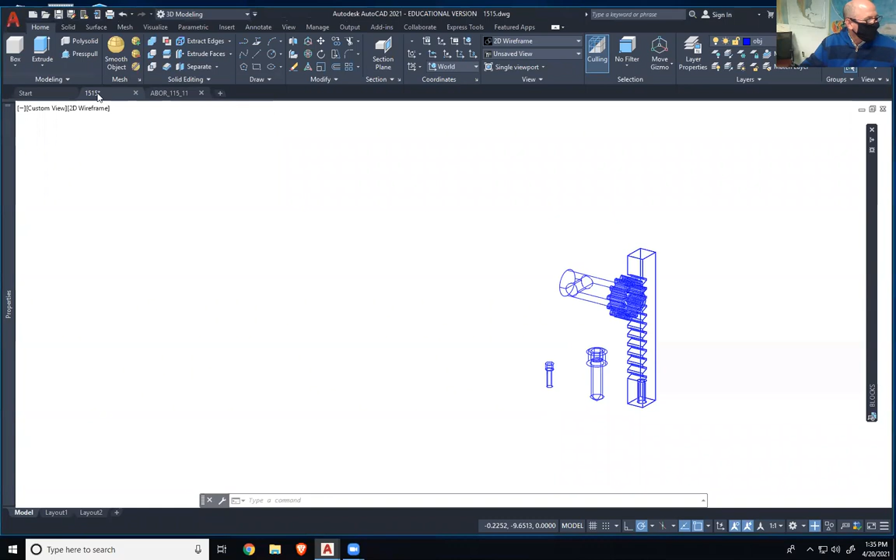I have this project in 2 files, or 2 different files, right? Although this seems to be gone. I wonder if I have that, so you can put it all together for your cover page, and the animation that we're doing.

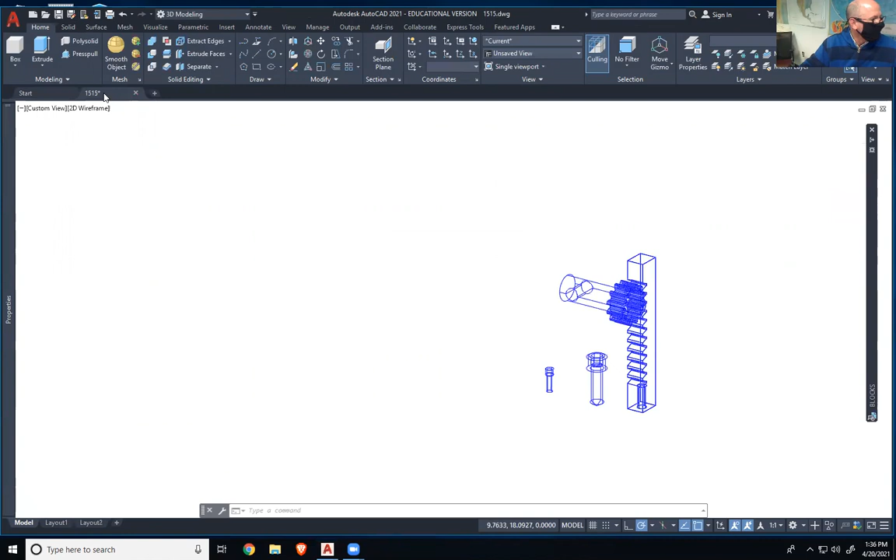Well, I might have to redo it. Anyway, let's not save that. I might have turned off some of the layers anyway. I'm just going to start with this one.

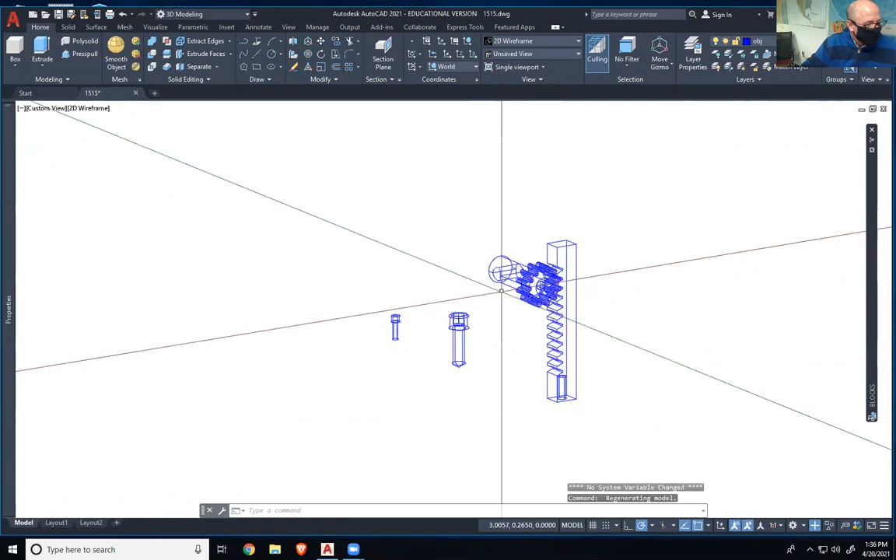So I need all this to be in position for the rest of the animation, right? As far as moving stuff around, I already have the gear and the pinion, and the rack, in the correct position, the correct distance apart from each other. So that's good. I'll put the handle through the hole here, and the column would be around that.

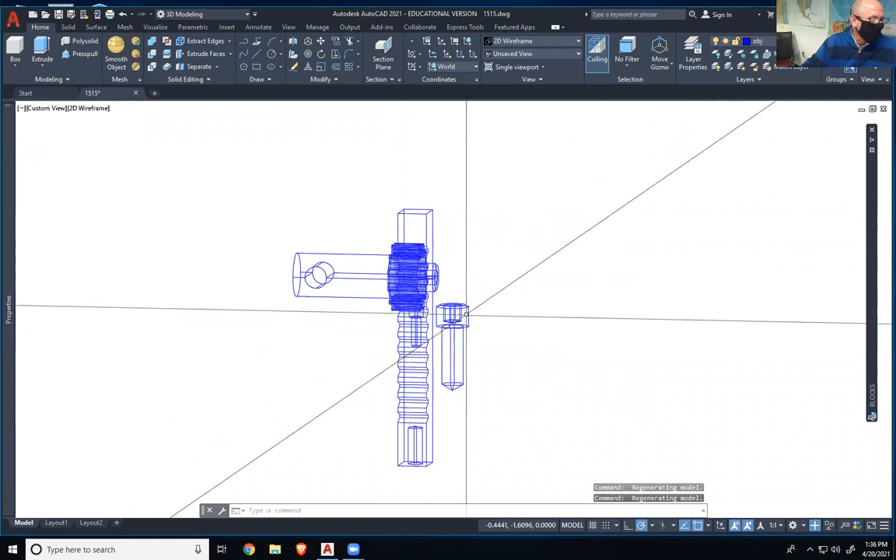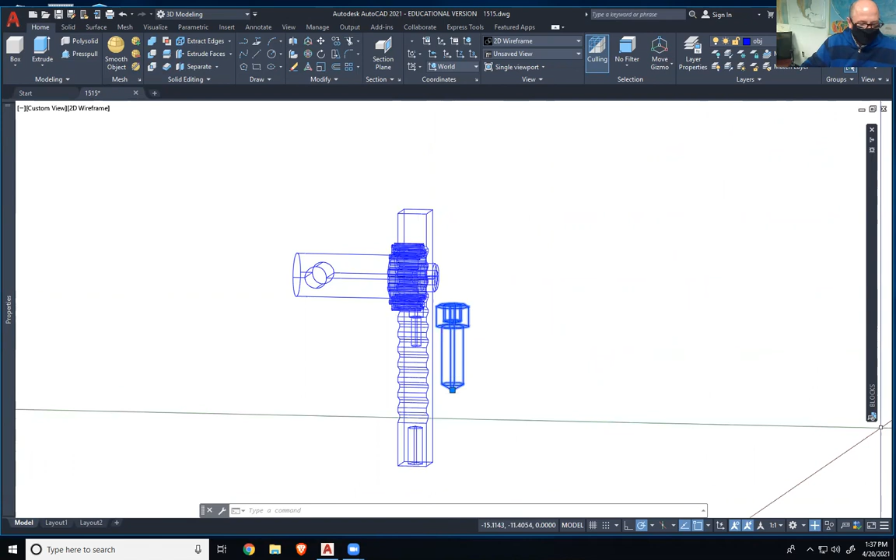This pin needs to be rotated and placed into position, as well as having the end cap of the rack, so it can have the whatever that thing's called, whatever the end of that cap is called.

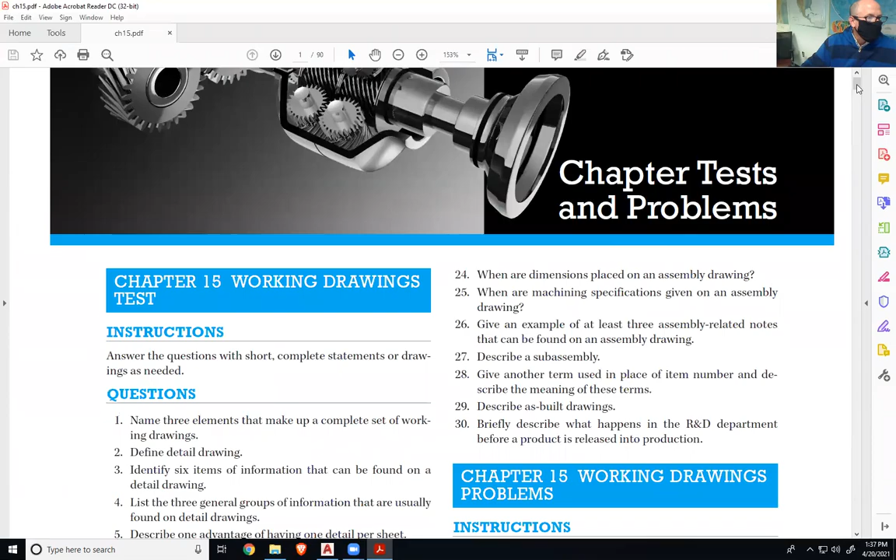I'll run this. Seems like, yeah. Hey. Where's the chapter 15?

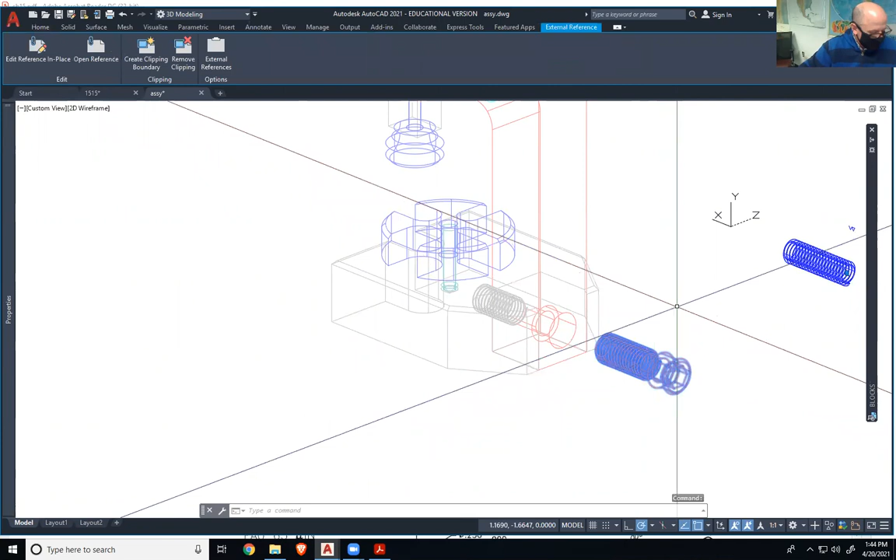All right, so I have it almost all assembled, just moving the parts together. I'm just going to use this as an example to show what all this was doing.

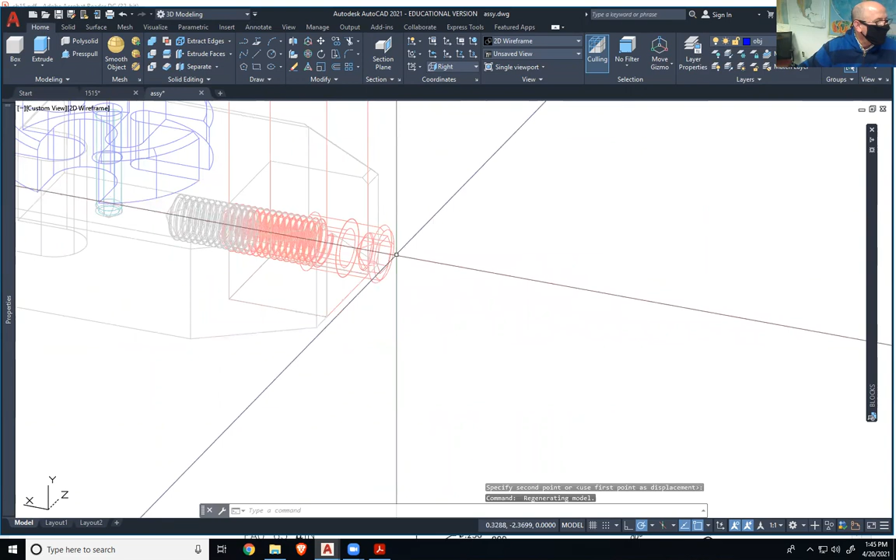I want this outside radius, this center to be centered on there, and that way the head of the fastener, or actually that's supposed to be countersunk, huh? So let's move it one more time from that center to this center. So now the head is countersunk.

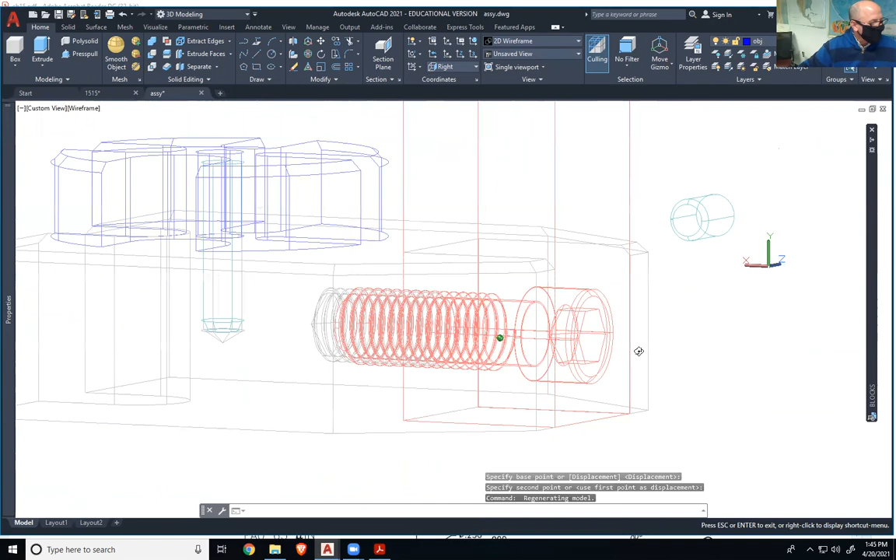Are we supposed to do the threads? No, I just did it for fun, but we don't have to. So I have the pin, so I have all the parts here that I need, and they're in position. Let's say we're at this point.

So now what I want to do is export each one of these individually, because if I do them all together, then I think I can explode them in Blender, but well, that may be easier, I guess. Let's just see how that works.

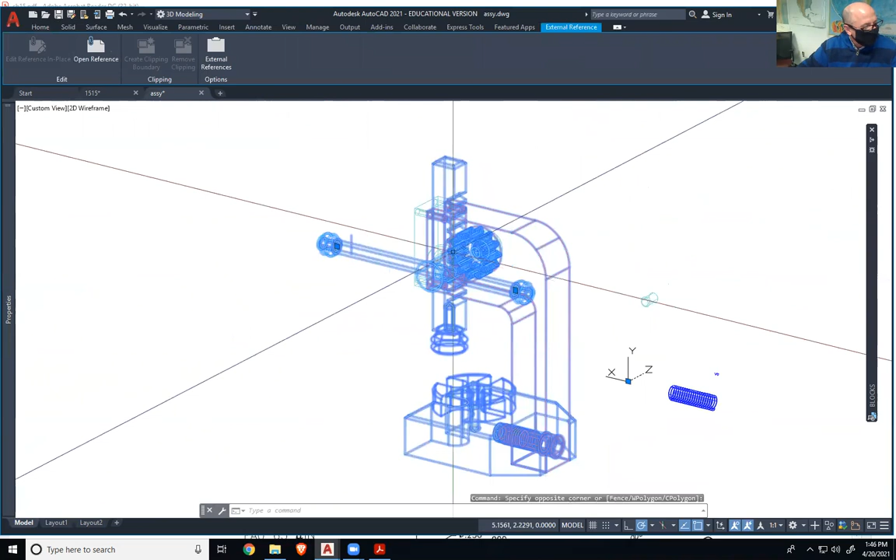So I'm going to select all of these, all the assembly. Although I didn't put these fasteners in here. For some reason I don't have these fasteners, so I get that part.

Okay, so I have them all selected, and I can just go and export them from the application menu to other formats. Blender takes a lot of different formats, but STL is probably one of the easier ones. In fact, that's what I'm going to use.

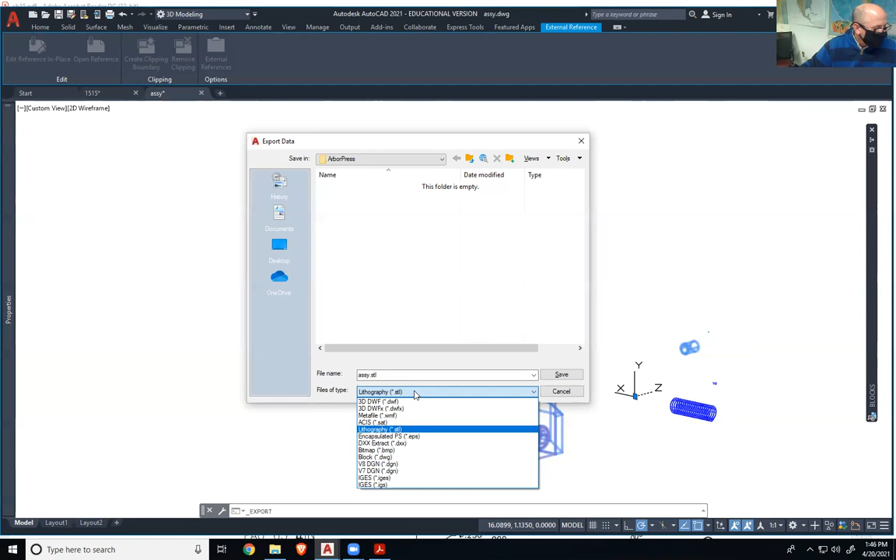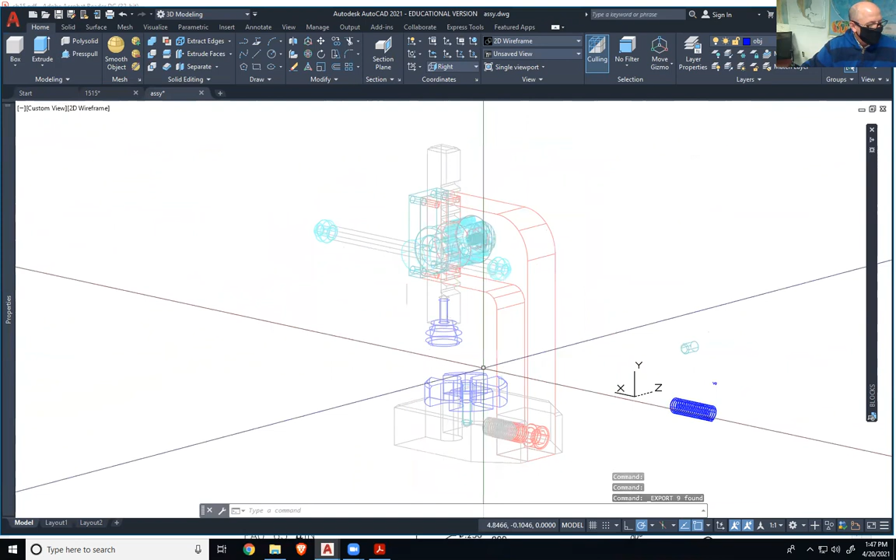So, call it... So there are 9 parts here, and I think that's correct, minus those screws that I left out.

Okay, so once they're exported, let's see what Blender thinks of them, and see how easy it is to break those apart. I'm not remembering exactly how to do that, but we'll look at it.

So we have Blender 2.91, I think, maybe 2.92. No, 2.91. Actually, I think your computers are 2.92, but there shouldn't be any huge differences that'll get us in the way here. I'm going to launch Blender, and then we'll import those STL files into Blender and see what we can do with these parts.

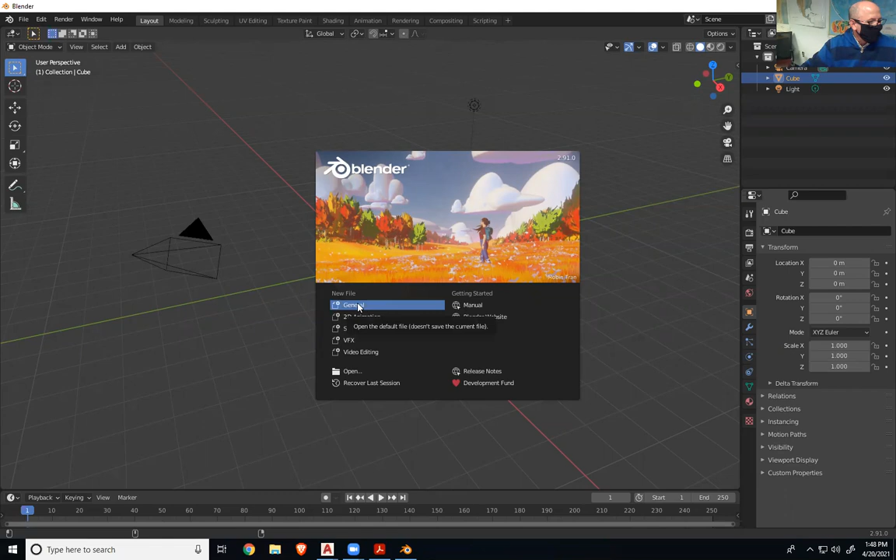There's 3 main functions that I want to emphasize in Blender. AutoCAD can do some of them, but it can't really do the animation very well at all, I guess. So one of the things is to animate it, just animate the assembly and maybe the operation of the assembly, as well as, so I think I'm just going to keep the regular general file.

What you're going to get here is a cube, which I'm going to delete promptly, a camera, which I'll leave there, and a lamp, a light source. So I'll leave those there, and I'm going to import.

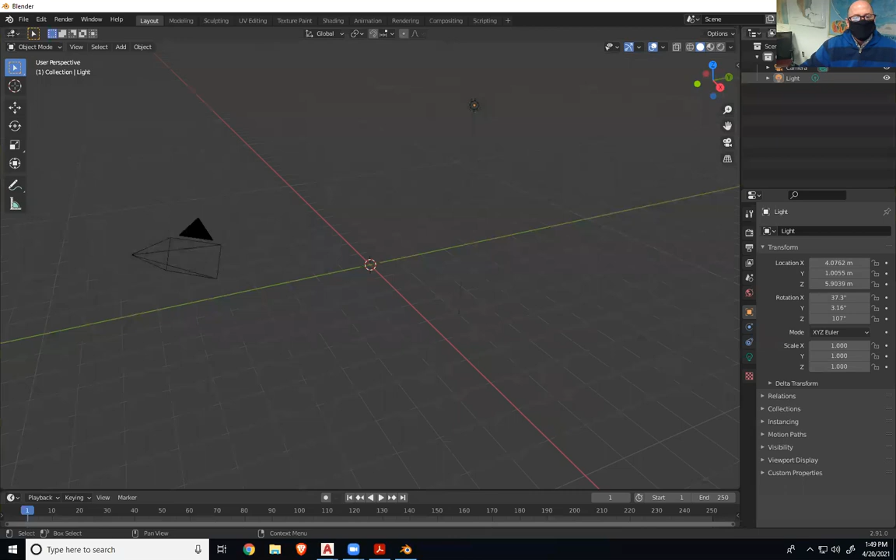But sorry, was there a question though? All right, so to import them, I'm going to go to File, Import, and STL. It's a good file format for 3D printing, as we've talked about before.

I don't know what this computer's doing, but it's kind of slow. Shouldn't be. Is it scanning or something?

Okay, so now I just have to find where it is. Oh, maybe I should save it, huh?

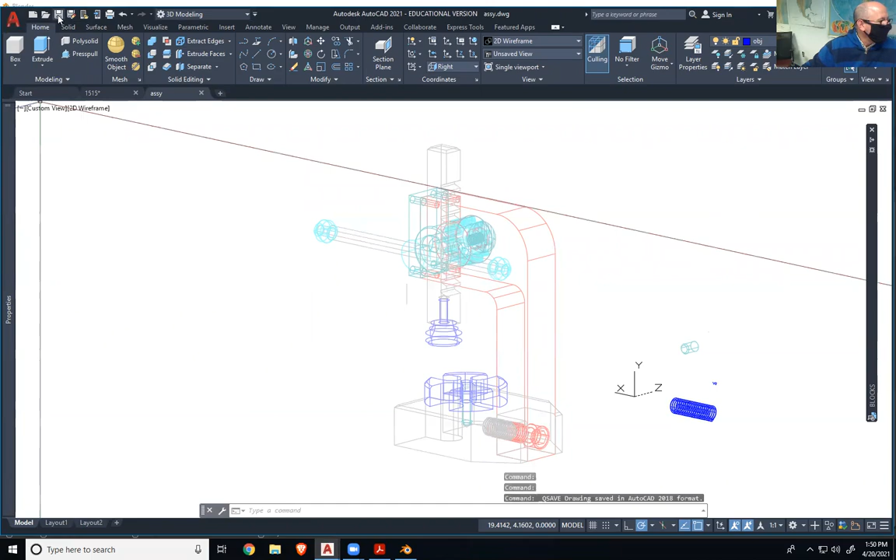Yeah, Mr. Stevie, are you recording this one? Yep. Yeah.

Okay, so here's the entire assembly. It's lying on its side. That's a little odd, I wonder why. Anyway, not too hard to rotate, so I'm just going to hit the R button, and that just does a free rotate.

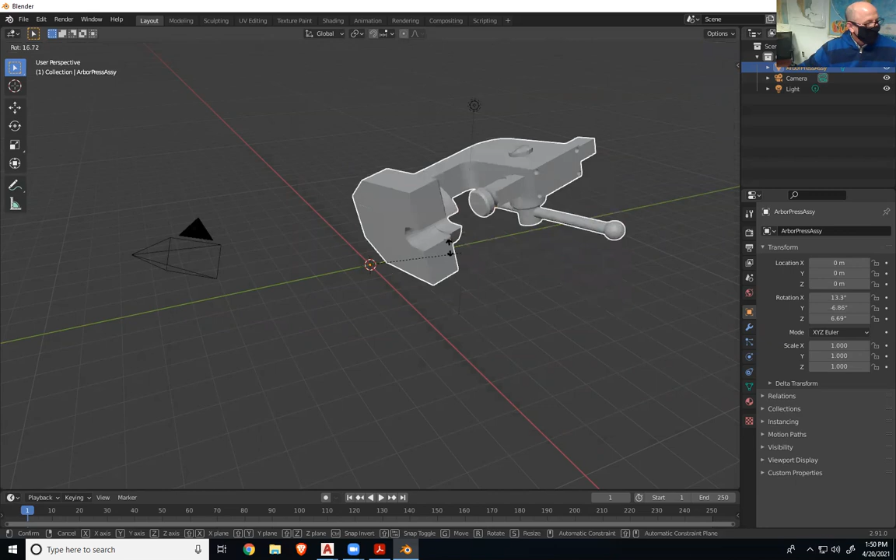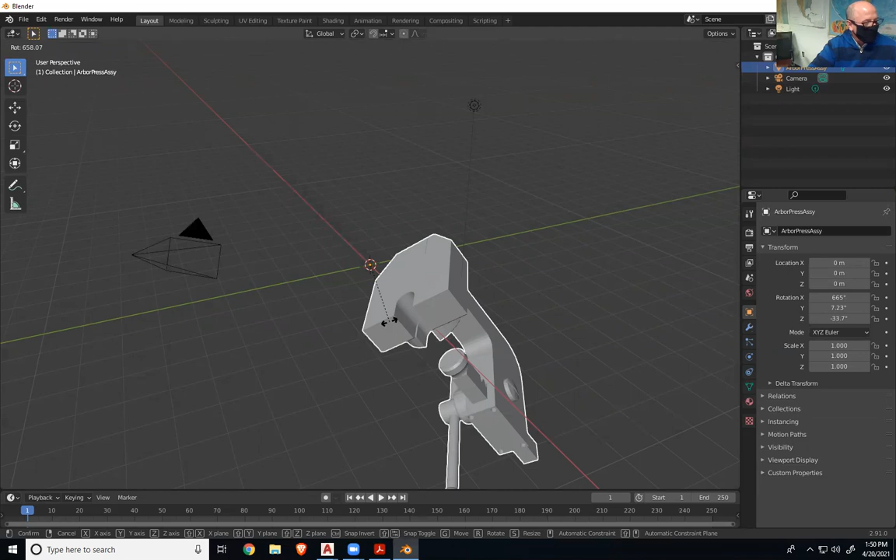Just like in AutoCAD, the color of the axes indicate the labeling of the axis, right? So XYZ and RGB are parallels, or whatever. So I want to rotate it about 90 degrees, about the red, which would be the X axis. So I'm going to hit X, and once I hit X, I can see that it's only rotating about that X axis. Then I'll just type in 90 here. It might be upside down, but it went.

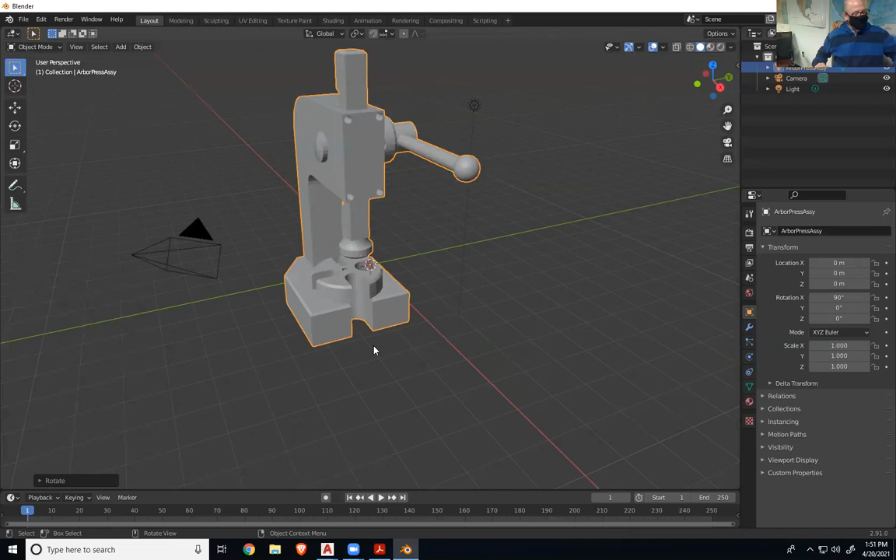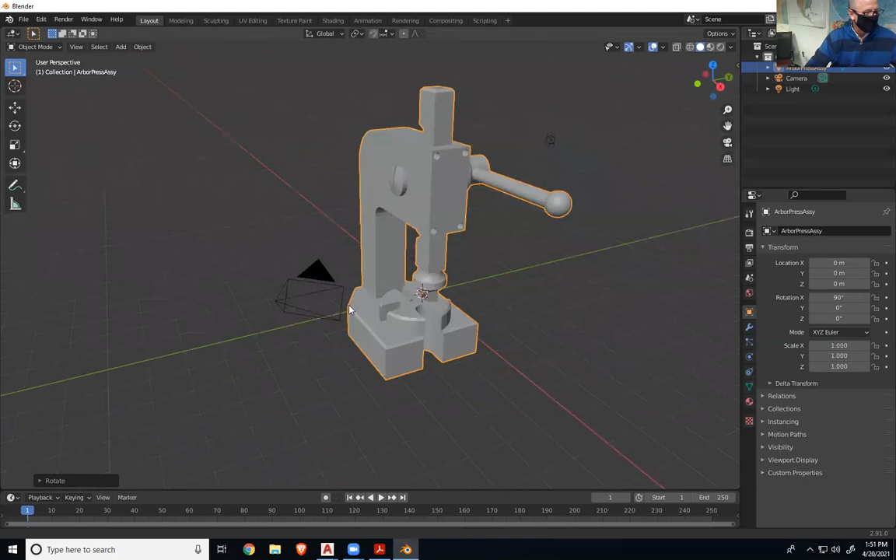As far as navigating, it works the same way as AutoCAD, except it's inverted in one respect. I can roll my mouse wheel to zoom, and I can use my middle mouse wheel as a button to orbit or arc rotate. And if I hold shift, it pans using the middle mouse wheel. So that's the only difference, really.

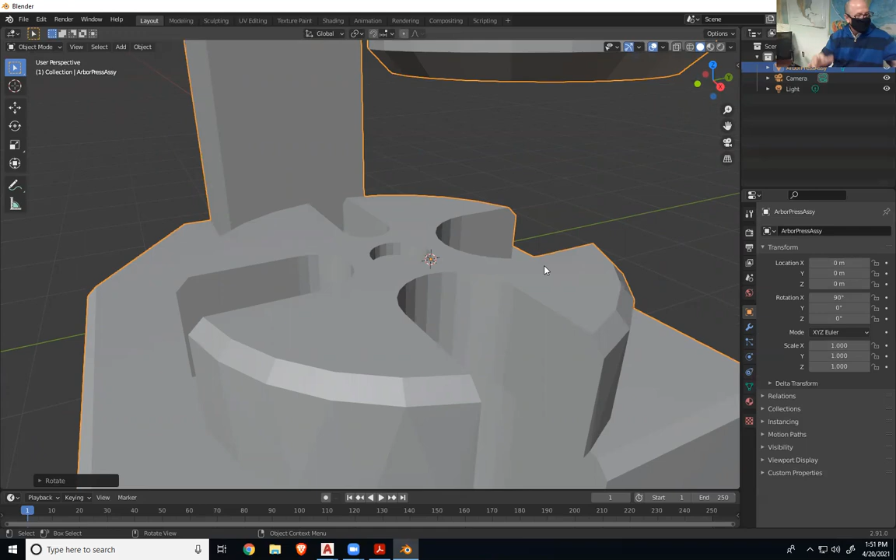The other thing I want to point out is if I look at how AutoCAD imported or exported the file, if I get in close, I can see that it does a pretty coarse surface interpolation. I can see the faceted edges. So maybe I could do better.

So I'm going to delete that, and we'll go back to AutoCAD. I'm just going to type in FACETRES, which is short for facet resolution. Right now it's at 0.5. I think you can put it all the way to 10, so I'm going to go ahead and put it at 10. It's just a system variable - the lower the number, the more coarse it is, but the faster it will act.

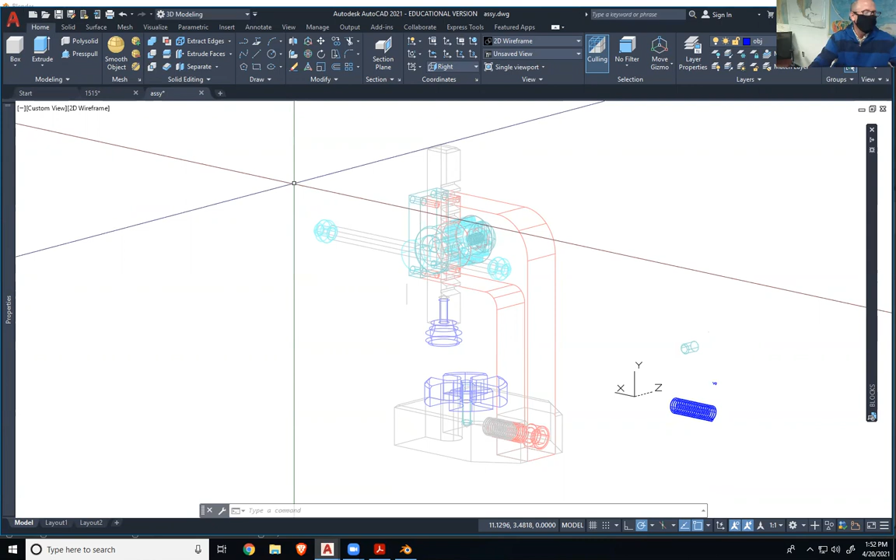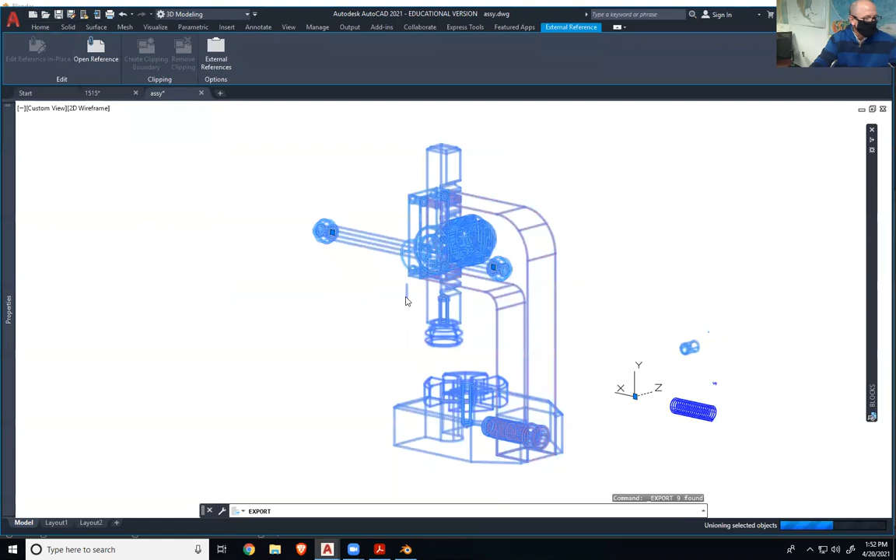Okay, so again, I'll select everything. I wonder why that doesn't get selected. Okay, and I'll go back to export, other formats, STL, and I'm going to overwrite that because that was the low res version.

And now it's unioning these together, which, yeah, that's probably not what I want, but we can maybe use Blender to fix that. And we're going to import it again.

Something's up with the file system here. Shouldn't take this long - it's got to be our server switches that aren't working right. Or maybe it's all the Bitcoin mining. Just kidding, it doesn't take networks that much anyway.

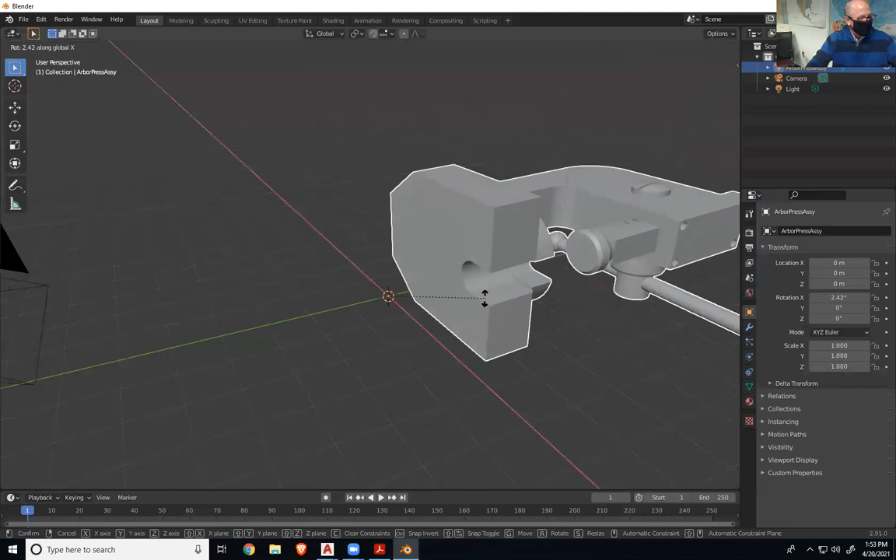Okay, so R and then X and then 90. So if I zoom in here, I can see that it's a finer resolution, not that much finer, but it's better. It's about as good as AutoCAD can do.

Did you say you unioned that all together, or are they still separate? They're unioned - AutoCAD did it when you export, if you select everything and export it.

But if I hit the tab key, this goes into what Blender considers edit mode. So here's some interface things to point out in Blender: right now you can use the tab key to toggle between edit mode and object mode. Object mode is just where you can rotate the object or whatever. Edit mode allows you to get to sub-objects, kind of like in AutoCAD where you have filters for vertex and edge and face and things like that.

So in edit mode, I can see some edges and things like that, but I can also pick what I want to edit. I think by default it's on vertex, but I'm kind of hoping I could get to some sort of element mode.

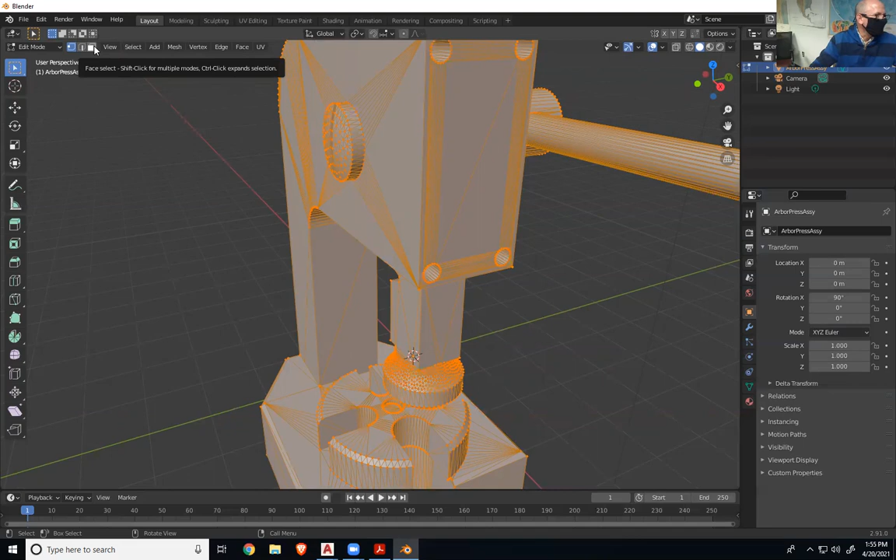Yeah, all I have - this is not great, this would be hard to select out. Vertex might be the easiest one anyway. So I have vertex, I have edge, and I have face mode. If I am on face mode, I can select the face and extrude a face, but those are all triangulated, and so that would be very difficult to manipulate and rotate the individual objects and things like that.

So, probably not a great idea. I might be able to, I'll try one more thing I guess.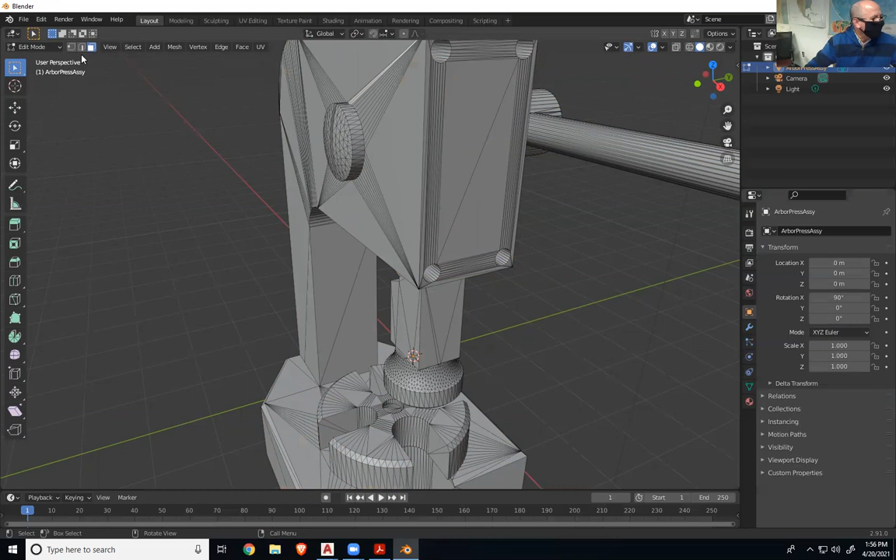So with this object, I can go to the wrench on the right, so I have different categories of properties - world properties as opposed to object properties, as opposed to modifier properties. So under modifiers, I can modify this object, which is kind of what I want to do, but I don't know if there's a good one in here.

There's edge split, but that's not going to help me much. I was hoping I could do something on the decimate, but that comes close, not really, because all that does is simplify faces. Kind of want to do some sort of explode into its individual elements or parts, but it doesn't look like I can do that. There may be one, but I'm not thinking of it.

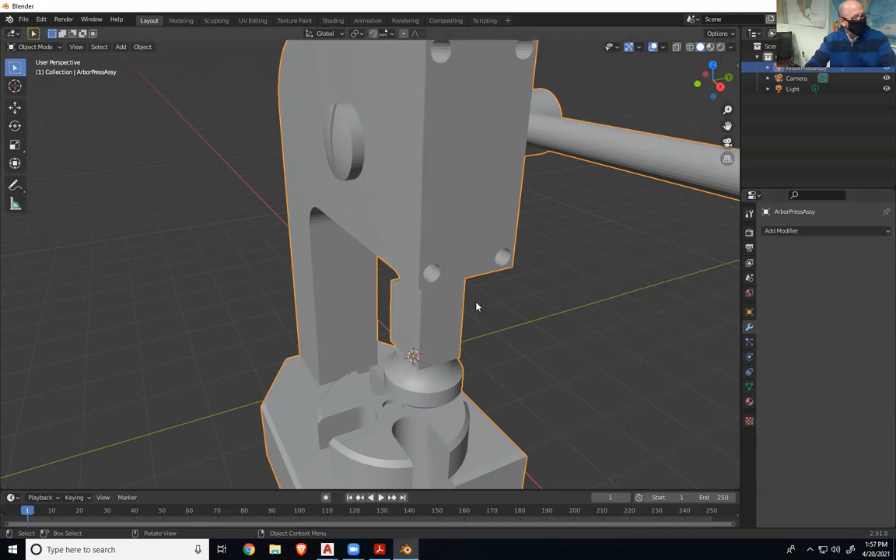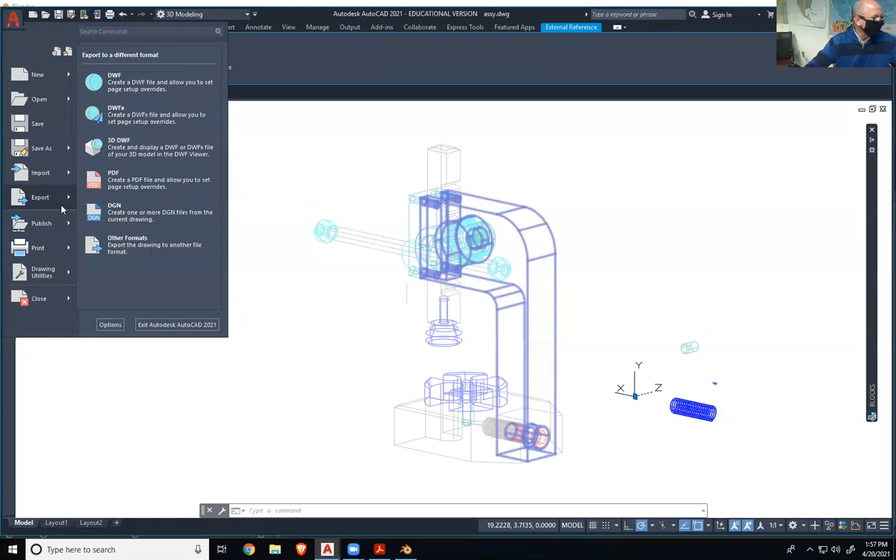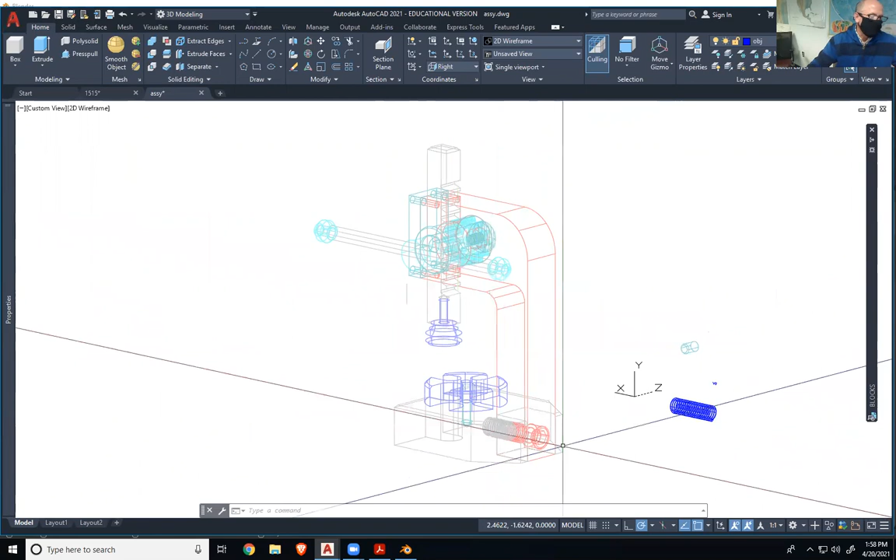So not so great. I'm going to delete it one more time and go back to AutoCAD and just do it one at a time. There's only 9 parts here, so that's okay. I'll start with a column and do the same thing. I'll just do one, pause the video, get it all set up and put it in Blender. So export other formats, STL, and this time I'm going to call it column. It's all going in an ArborPress directory anyway, so I can just name the parts and I'll know what that is. I'm going to pause here and get them all going.

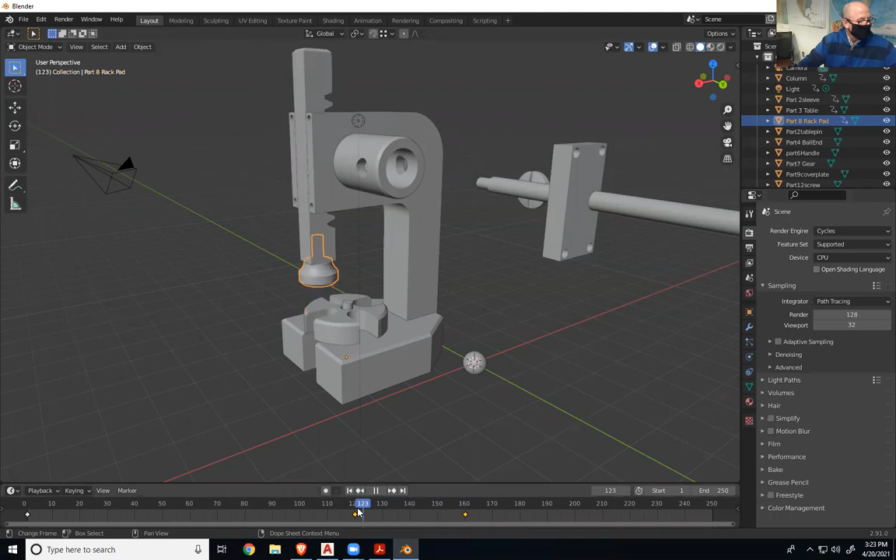Okay, so I've just set some keyframes. Forgot to record, sorry about that, but I have this thing moving. From frame 120 to 160, I have the rack pad and the rack moving together to press down on something. In the meantime, I want this and the gear.

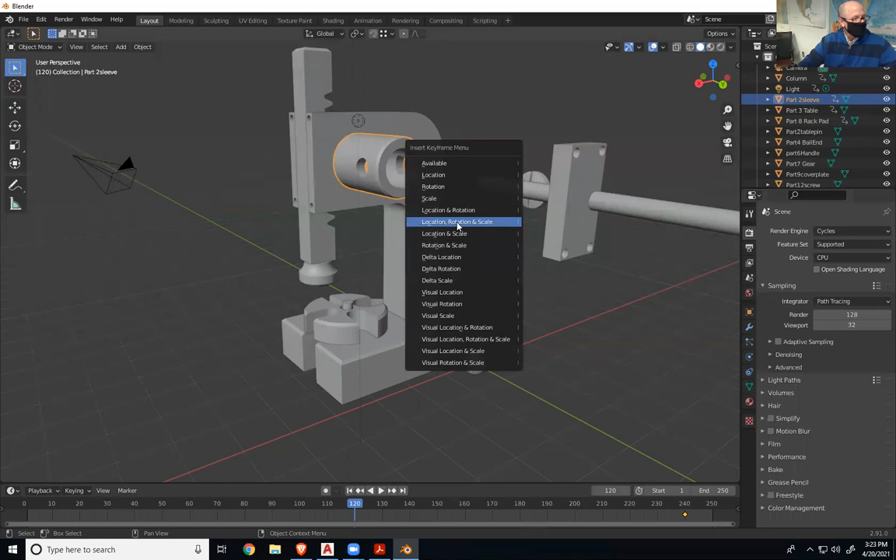I don't have the gear in there, but I'll use this as an example. I want that to rotate, so I have to set a keyframe at this time. I just hit I and location, rotation, scale. There we go.

And at the end here, well, I'm just going to push that in. Not just that. I want to rotate, so I'm scrolling over, I want that to rotate as much as that moves down, maybe to frame 160, and then I'll rotate this thing. So R, and I'm going to rotate it about the Y-axis. Oh yeah, see its midpoint there? It's going to rotate about that, and that's not going to be good. So hit escape.

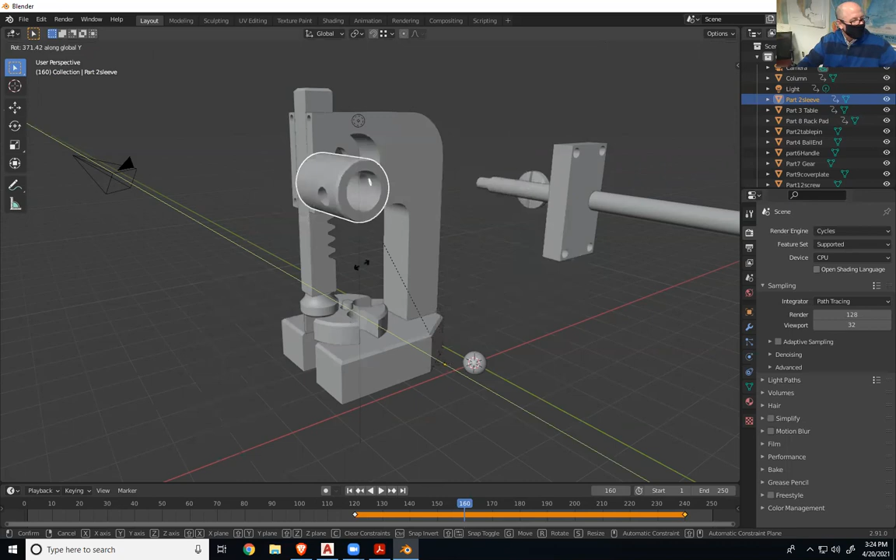I need to move that center point, so I think I can just right-click and set origin to geometry. Yeah, there. And then rotate about the Y. Now I can rotate it maybe, I don't know, 270? Let's see what that does. And then I hit I, and location, rotation, scale. Okay, so now.

Oh, because oh yeah, I got it. The origin, that little orange dot, is the origin of the part. I animated the origin moving to the part too, so it's still going to rotate about its thing. So in this case, can I delete that keyframe? Delete keyframes here. Delete keyframes. I'm going to even take this one out.

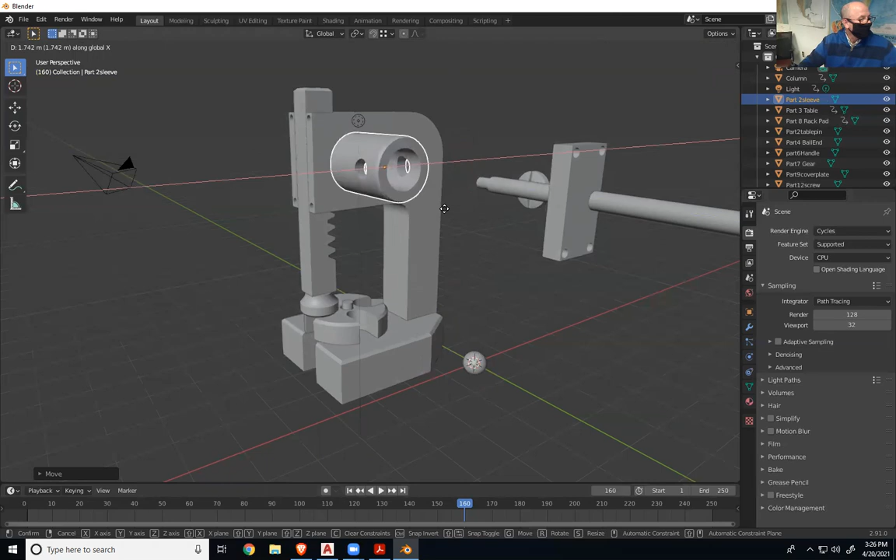Okay, and I'll move it back up into position. GZ. Yeah, see, for some reason, GX. Okay, let's say that's in the right position. So now at frame 120, I want to insert a keyframe, and then at 160, I want to rotate it, and then R, Y, and then 270, I guess. Let's see what that does. And then I, rotation, location, scale. There we go. Not bad, not too bad, I guess.

And I would scale that out a little bit to make that rotation look like it was actually moving the rack, keeping the proportion nice there. Is there a way to figure out the ratio? Sure, you can just take the pitch diameter, look at its circumference, and one rotation will move that circumference at the pitch. So if the rack's moving 1 inch and the circumference is 5 inches, then 1/5 of a rotation will get you 1 inch.

Okay, yeah, so nice, good question. Okay, cool, all right, so we'll stop there, but that's what we're going to do. And then we'll talk about materials, make it look good, and lighting and stuff next time.